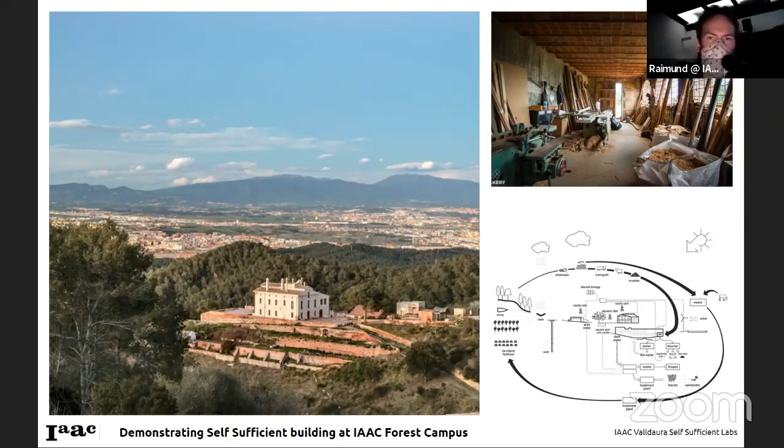So now, how is IAAC connected to timber? Well, it turns out that actually we do own a forest. There is a property in the north of Barcelona, this fantastic campus of Valldaura, where there's a group of students living there and exploring self-sufficient buildings in a dedicated master, building prototypes like this one.

But also, when you have a forest, and this is something that for sure Martin will recognize, when you start understanding the material from its origins, and scanning already the growing trees to impact the design of the finished structure, then this is something that becomes possible when you're so close to the origin of the material.

And this is a project that Jean-Nicolas and Surush Garivani were doing at IAAC a few years ago in the Master of Robotics, scanning timber and doing this kind of wood sashimi. And the approach is to kind of tame the material, not by standardizing it into simple geometries, but to have an understanding of the material on a quite complex geometrical level, and with advanced fabrication methods, these geometries

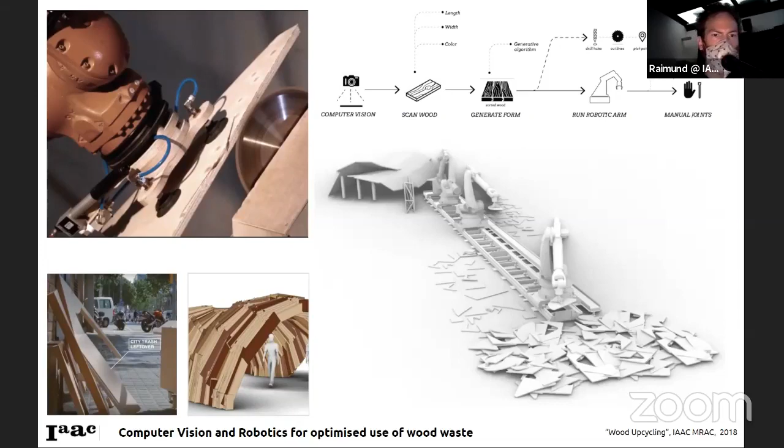And then the almost, let's say, normal way to use a robot just to do these dull, dumb, and dangerous tasks, repetitive and boring, but with slight variations in geometry that are difficult and for sure expensive to do with human workers. And this is actually the predecessor of the structure that we put on the rooftop this year.

A greenhouse that consists of these standard profiles in a particular arrangement. And right now we have the follow-up project of this one on the way, which will be a greenhouse we're building in Sofia in the course of a European project.

And last but not least, from the seminar that Manja and myself are teaching, we are doing this kind of timber, let's say, almost as an educational tool for first-year students to understand about fabrication, structure, but also assembly, logic, etc. Everything needed to actually physically build a structure like that. And this happened to be in Kathmandu, in Nepal. So yeah, that's it from my side.

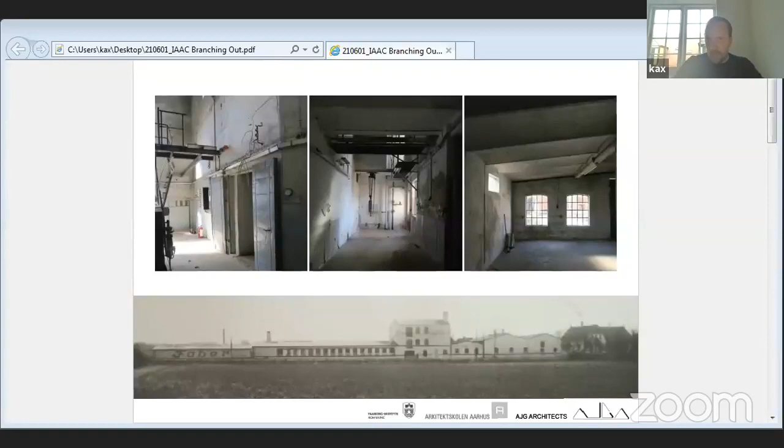So I'm just going to go ahead and share my screen. I hope I'm getting this right now. Do you see the slide? Yeah, looks good. Okay, good. Just going to try and make it full screen.

Right. Okay. So the project, as I said, is an applied research project, which we got a grant for from the government here in Denmark, trying to address one of the issues which is not only an issue in this country or in Europe, but also globally: the enormous amount of actually quite qualitative empty buildings that we have sitting around in the countryside, which is mainly due to two reasons. One is the rapid urbanization that we have obviously experienced in recent years, as well as the fact that, especially in Western countries, a lot of industrial buildings are left empty because production has moved to the Far East, which is the case with this project.

So this is an old factory in the middle of nowhere in Denmark. It used to house a factory which produced blinds and curtains. But again, the whole production moved to the Far East, I think like 20, 25 years ago. So the government came up with this proposal to give a grant for coming up with ideas on how to retrofit these types of projects. So this specific building is just meant to be viewed as an example. We were more employed to produce a strategy on how to generally retrofit empty but quality buildings in empty areas.

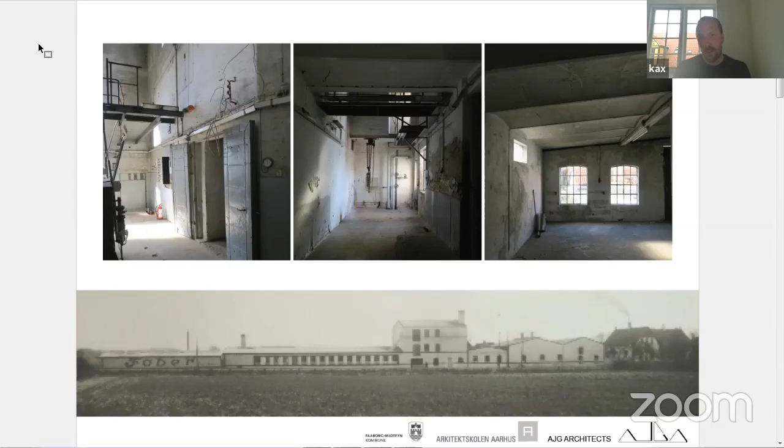So it's an old factory in the middle of nowhere in Denmark, and since I only have 5 slides, I'm jumping quite fast, but one of the targets was to employ digital fabrication and manufacturing techniques. So we started out by scanning the entire building. And what often happens with older buildings is that it doesn't look the way it did when it was planned out and drawn. New additions appear, it gets remodeled, things start falling apart here and there. And so it's actually extremely difficult to just go in and retrofit it immediately, at least with clean methods.

So the idea is that we scanned the entire building, which would enable us to extract exact data out of the model, and thereby produce, for example, in this case, I'm using the example of the partition wall, which is the simplest component that we had, an exact outline of the wall to be put in place.

And the other part of the project, which I myself find extremely interesting, is that even though the objective from the beginning was to employ digital building techniques, since it's an applied research project, we knew from the get-go that there would also be a process towards the end where we would have to hand over building material to workers who are actually carrying it out using predominantly manual conventional building techniques. So this balance, to which extent it makes sense to employ digital building techniques versus conventional building techniques, is something that we tried to plot out very deliberately from the get-go.

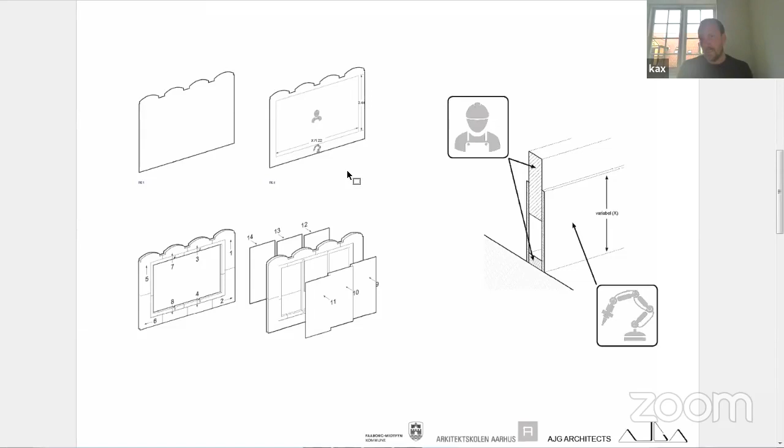And so thereby we have this entire strategy on how to try and retrofit an entire existing building from the inside by creating a sort of lining on the inside, which is made out of LVL rafters and digitally cut CNC pieces that fit precisely once you start assembling the pieces from the inside.

So the process looks something like this. You would create a digital model that accurately describes whatever panels and walls and elements that you have inside. We test it against the scanned point cloud model, and then what you see on the far right image is a one-to-one mock-up which we did at the Aarhus School of Architecture. Just to start to test things out, and it actually worked quite well.

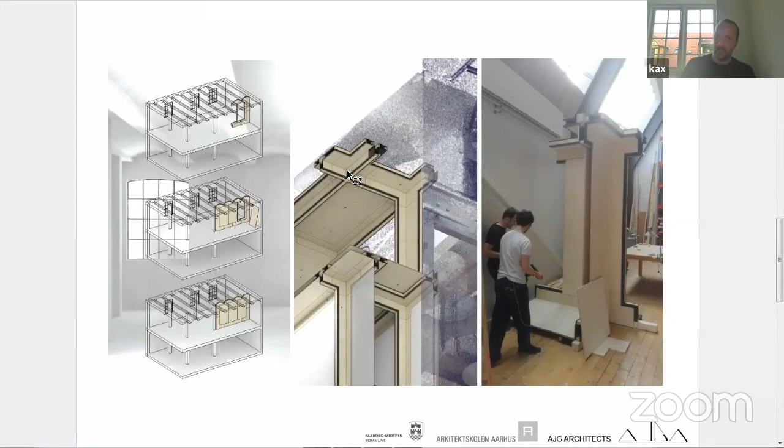So it's a multi-layered paneling system where you can either fit insulation or pipe work such as electricity or hoses or water pipes inside of it. But obviously after this process, things started progressing a little bit as we were working towards the final product, where in the end you actually end up with something slightly different. I mean, it's the same method that we've been using the whole way through. But as soon as things started getting real, we had to adapt to the existing conditions, also considering the fact that this is actually a rental space.

We have created algorithms that actually calculate how you can maximize the amount of standard panels versus the CNC cut panels that we would use to fit out the spaces. So this is the result. It finished maybe a year ago, 6 months ago, and obviously the idea is that this is a method rather than a final product.

So right now we're working on a similar approach in another post-industrial building. We're turning an old factory into a headquarters and an office space for a clothing brand. So I hope that this already broadens the idea of what you can use timber construction, or ideas of using wood and digital fabrication, for.

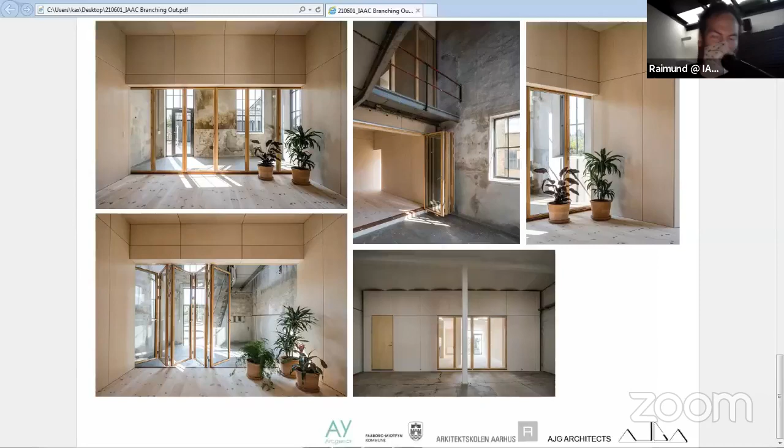Yeah, super interesting. Also the two approaches: one of super custom tailoring of these neuralgic interface pieces, and then using standardized sizes wherever possible. So very interesting.

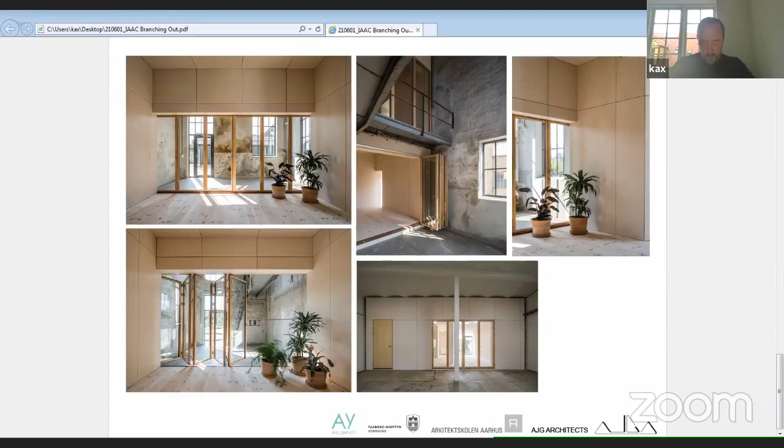I don't know if I can kick you out or if you have to stop sharing your screen. I probably have to stop sharing, right? Let's see. There we go. Thank you. Teresa, are you ready? I am ready. Whoa, hang on a minute. Okay. There you go. Can you see my screen? We do see your screen, but the full screen didn't really work. Then I'm just gonna stay in the slides. Oh, that's fine. So you see it now.

Okay, so thank you very much for the invitation. My name is Teresa Cheung, and I have taught in Alice for quite some years. I am now the academic head, and I run it together with my colleague Daniel Zamarbide. And the chair of Alice is in fact Dieter Dietz. So we take care of the first year teaching program at the EPFL.

And Alice stands for the Atelier for the Conception of Space. So as our name suggests, space is at the heart of our reflection, both in its construction and its conception. The first year is supported by many different structures. One of the most essential of which is this. It's a year-long program that spans over 28 weeks.

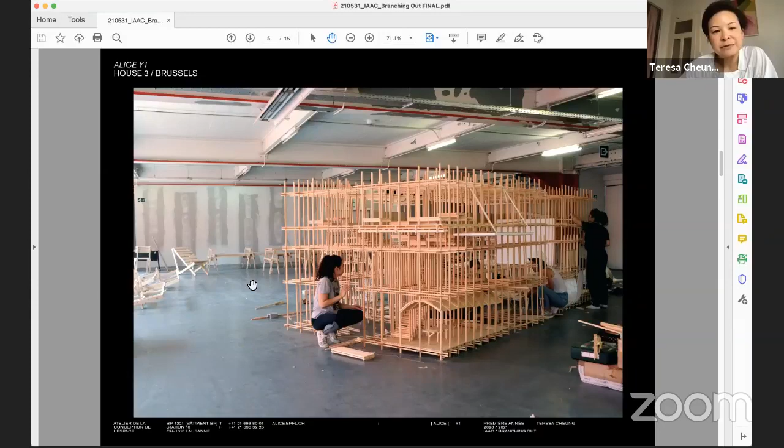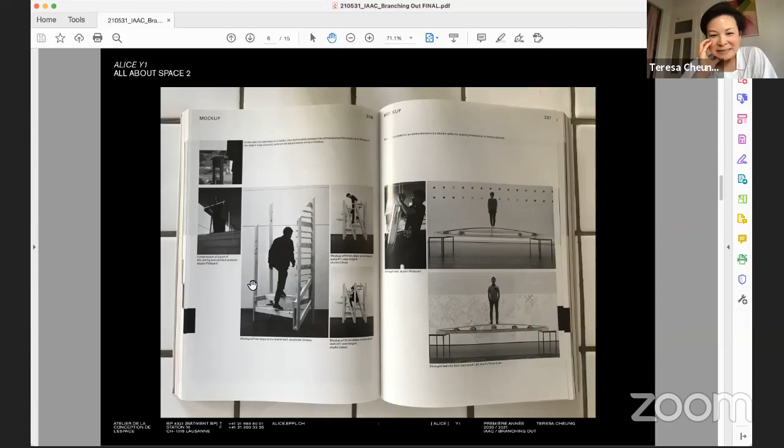Here you see a really full-blown 1-to-1 model of the protostructure that was devised for Brussels in 2017. And it's really a structure that allows for students to negotiate and appropriate space and to articulate the spatial practices that are implied by the projects that they propose. And as I said, we have no atelier space, so everything has to be able to take place within the school ateliers. And here you see a series of mock-ups that are being tested, that exist in a book that Alice published a few years back.

But I think also for us, the tools or the manner, the attitude which we are faced with when we work with these, and we work very simply with it. In fact, we are often using profiles of 60 by 27 or 100 by 27. So our attitude towards it is we find that it's very similar to taking a pencil to paper or a knife to cardboard. We also do a lot of casting, and then the saw to the wood. So we find that the attitude or the behavior is very similar, or it can be very well echoed amongst each other.

And we also have, despite the last 3 semesters, which has really put all of this into question, for many years been teaching our students to draw by hand, mainly for its slowness, its ability to allow time to reflect on what the students are doing, but also this very physical connection between what was speculated in the mind and then a physical act of bringing it out.

So, these are the kind of tools we use. I guess the most crucial one here is the Japanese saw. Pretty much everything that we build is cut with a Japanese saw. It's only in the last 2 weeks that we have access to 2 kind of circular saws. Otherwise, it's the Japanese saw and a series of electric drills.

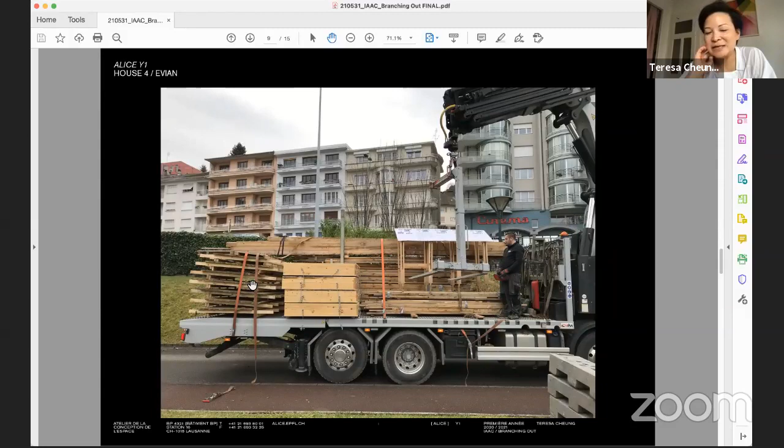And one time it was hand carried 500 meters from the ateliers to a site on campus to be installed. Another time it traveled from Lausanne to Brussels. But we go to the lengths of even making the students draw how they would pack every truck load that has to go anywhere.

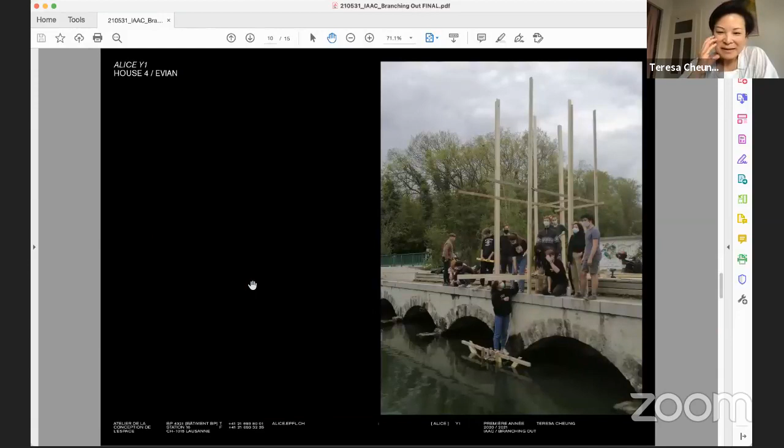And of course, I think we are often in very public places. This year we worked with 4 communes in Geneva, as well as the city of Geneva. So it was a lot of politicking around. But I think what has been really nice with the quality of this material is that it has always allowed us to be very sensitive, very light in the way we touch the sites. This is actually not Evian, this is actually this year. This happened a few weeks ago. Students were testing out a way to anchor onto this small bridge.

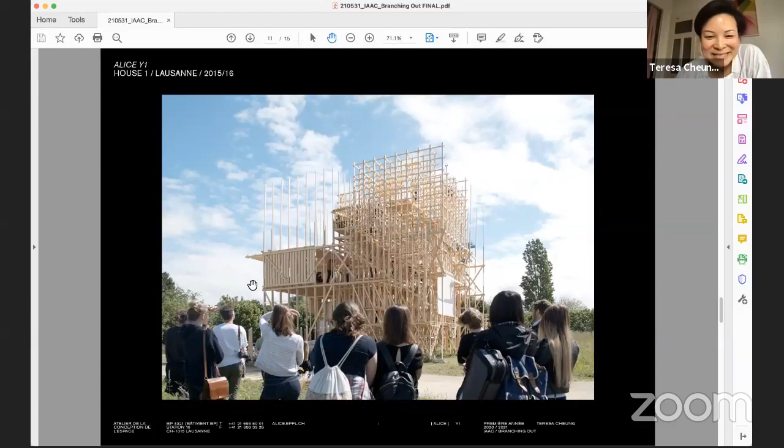And the concluding slides are just a series of the results of the past years. We call it the house series. Each of the protostructures for each of these years have been slightly different in dimension, but also in how the node has been conceived. This is house 1 that happened on campus in Lausanne, which was an open space.

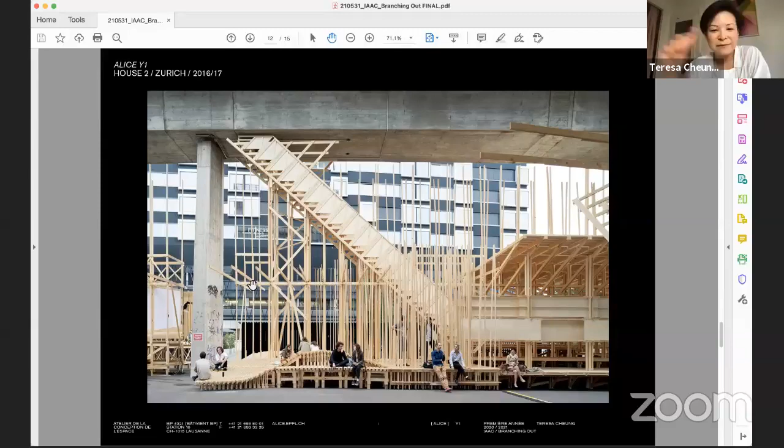And here it's house 2 in Zurich, which was right outside the art school, in case anyone is familiar with Zurich, which has this really high and very long highway that goes right next to it. And actually this is just the very start of a very, very long strip that travels all down this infrastructure. And then house 3 in Brussels in the old Citroën garage. That was another site condition again, that was completely an interior condition.

And then house 4 in Evian. And actually it was at this moment that they started to fragment into pieces. So this is one of, I think, 6 fragments that was orbiting the Jean Prouvé pavilion as part of the Evian mineral water complex.

So yeah, this is kind of what we do at Alice, and thank you for listening.

Thanks very much, Teresa. Very inspiring, and also I'm looking forward to the contrast that we have here from the different approaches and focus areas of our guests this evening. So from a, let's say, very crafty, hands-on classical tool approach, we're moving over to Martin, and I'm curious what you're going to show us.

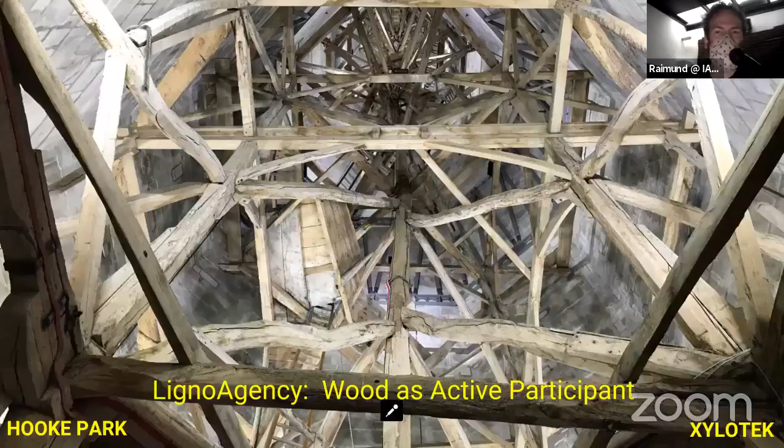So far, no sound. Apologies for that. Can you hear me now? Yes, we do. Great. So yeah, thank you for the invitation. Real pleasure to be speaking.

I think it's right that I'm going to present a bit of a contrast to Teresa's presentation. I think maybe not so much that it's less crafted, but there's certainly less straight lines in these 5 slides. I'm just going to cover some little snapshots and some thoughts, I suppose, rather than any sort of complete project discussion.

I'm speaking a bit with 2 hats on, as you introduced me, from my academic background with the AA at Hooke Park, a woodland campus, really timber focused and very much engaged, much like Valldaura, in directly working with the wood and the local material. And then Xylotek is a practice that's emerged a bit from that, set up with 2 other directors, both people we all met through supporting the projects at Hooke Park.

I think, some lessons learned from working in that environment, but trying to bring that into a practice that's operating commercially and in the context of the timber construction industry. So, interesting crossovers. I mean, this slide, I guess, is a sort of provocation.

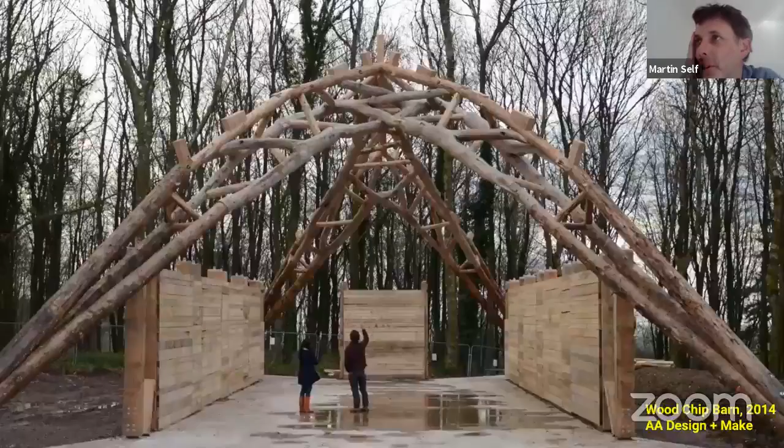Sort of jump to one of the Hooke Park projects, probably familiar to quite a few people, obviously relates to the work that IAAC have been doing more recently that Raimund presented. So I suppose it's taking three key elements: an understanding of the form of the tree itself, the potential that 3D scanning is opening up to really capture digitally the inherent form of the timber, and the possibilities offered by robotics as a way of working with an irregular material, but very precisely at their intersection points.

So this is the product of one of the Design and Make cohorts. Design and Make is a master's program at the AA, based on the premise that design can happen through acts of making. So in different scales, but very much working with wood, located at the Hooke Park campus here. So the potential is quite profound, that literally the trees you can see in the background of this picture are the material for that structure, and really trying to exploit the particular inherent capacities that the tree has. It's a natural material. There's a deep evolved capacity of wood.

I think perhaps part of what I'd like to advocate here is that we shouldn't just be thinking of wood as stuff that we use like other materials. It has these very particular internal structures that are a consequence of its capacity to grow, its capacity to transport water and sugars through it, its very particular responses to light and to structure. And we can either try and average those out in conventional engineered timber technologies, slice it up and glue it back together, or we could try and work with those qualities that are the inherent developed characteristics of wood. And I guess something that this project is trying to capture is that there is this alternative view of wood as something where you work with its characters, not seen as deficiencies, but as potentials.

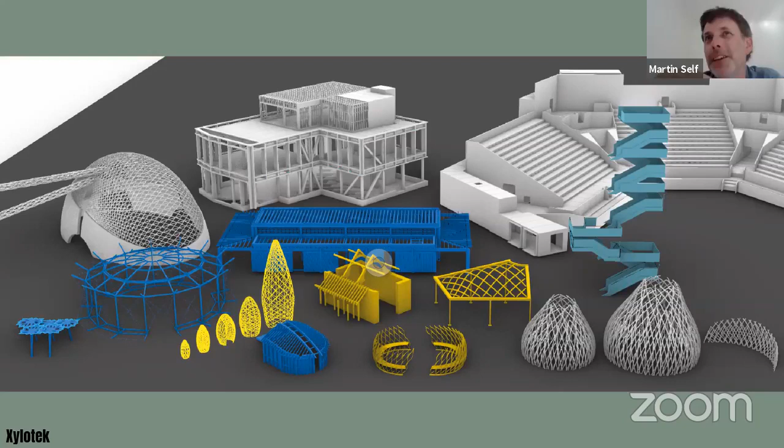So fundamentally, my co-directors have both come from making backgrounds and deep embodied knowledge of working with wood, trying to marry that with the technologies, and running a workshop where we do smaller scale stuff. So the prototyping and the smaller, more hands-on stuff to keep a feedback between the consultancy work and the made work. So we're quite young, but we're working at a bunch of scales. The blue things we've completed, the yellow things are now more or less on site or close to completion, and the grey things are things we've consulted on or are now through design stages seeking to deliver in the future.

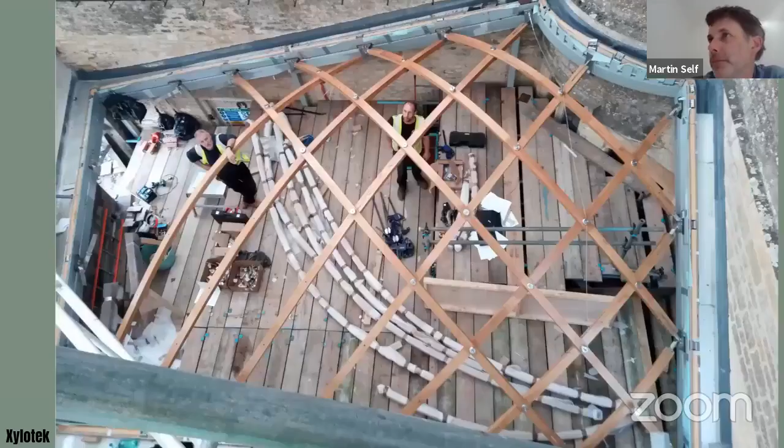This is the project. This is on site now. This is taken on Friday. It's a small little project, but quite a bit of work just to refine how you develop a single layer grid shell in a way that works in sympathy with the material. So it's going to be glazed. It's a semi-internal space glazed grid shell.

Each lath is formed geodesically, so it's working with the wood hopefully as efficiently as possible. So taking these oak lamellas, which are straight laths, straight lamellas that then just bend in their minor axis sense and twist to take up the shapes across this doming form. So it's quite a neat technique for getting the material to work in sympathy with the geometry coming together.

And the final slide, a bit of a teaser for a project that's just finishing up in Paris, not yet in the public domain, but this is smaller scale pavilion work, work with steam bending, so a magical process of plastically transforming wood's form. This is with ash.

It's interesting to argue, I guess, about the pros and cons of the industrialized paradigm of the timber industry. I think Katerra was mentioned earlier. The move towards major industrialization obviously has its benefits of economy of scale, but perhaps is also risking taking away the ability to work closely with the material. In the 21st century, we have other potential to work with more distributed modes of manufacture and to bring our technologies to the material, and not necessarily to pursue a major centralized approach to production.

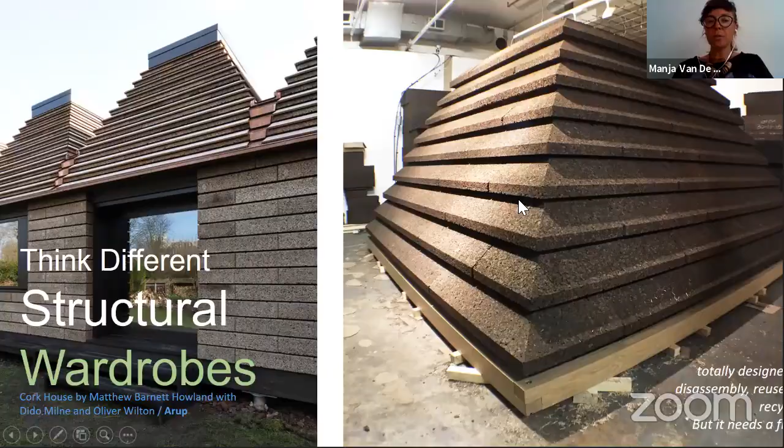So what is important here is that timber is actually working together with cork, thinking differently with these timber structural wardrobes. So this is the Cork House. You must have all seen it. It's really about design for disassembly, reuse, recycling, etc., and obviously trying to use a new material. But here timber is the reliable friend to cork, because it has, as you see here where I'm pointing with my cursor, structural wardrobes that ensure that they could actually use an unfamiliar material.

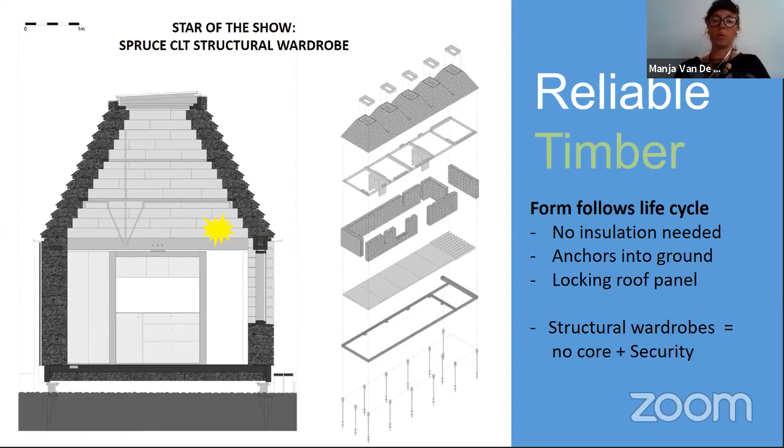So in some cases we try to push the boundaries of timber, but in other cases it can also allow us to push boundaries of other materials. And I thought it was quite great. So if we are thinking about this way of friendship, this is another project where timber is thought of collaboratively with concrete. It takes two to tango.

So this is a project that I did together with Adrian Campbell, where we created together with Waugh Thistleton a feasibility study to create a combined concrete and timber high-rise structure, so 23 levels, around 72.5 meters tall.

But what I want to say is that when there are two people dancing, so in this case timber and concrete, obviously there's not one way to do it. And obviously we can think of different kinds of hybrid systems. So is it the glulam with CLT infill structure, or is it the clear span CLT that actually spans directly from the perimeter to the concrete core, or is it all cross-laminated timber?

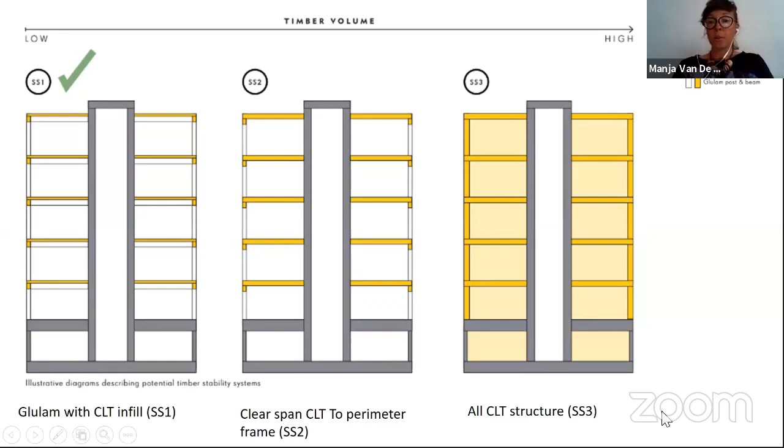So here it says that the timber volume is obviously increasing, but actually what I want to say is that it's not all that black and white, because for each of them there are pros and cons on how they work together. And perhaps in the first one, where it has glulam and CLT infills and CLT floors, maybe the whole buildup is thinner, but there needs to be much more coordination with the downstand beams.

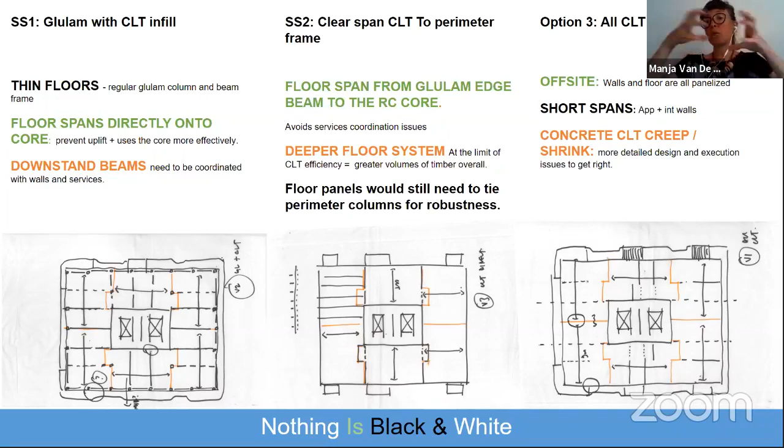Or if you would go for option 3, which has an all CLT structure, which can be really fabricated offsite, then we still have issues on how to combine the CLT with the concrete when we are looking at creep and shrinkage of these two materials.

But because it's not black and white, actually this is really great, because if you're thinking about, let's say, two materials or two approaches combining, in this case an OSB block system, which is called cassettes in this case, developed by Mass Bespoke, which I worked on as well, it is actually combined with other standard elements.

So similar to the first project where I talked about cork and timber, in this case it's standard timber elements, either shown on the left-hand side as beams or on the right-hand side as vertical elements, columns, that then work together with a less off-the-shelf system. So this dialogue between the two I find really interesting.

Then not only timber to timber or timber to concrete, but if we are looking at, for example, steel, this is another project. Actually, it has been done with masonry bricks. But I want to showcase it also as an intention where we can bring together, in this case, this very thin metal strip that then is going to get infilled, which could be with timber blocks.

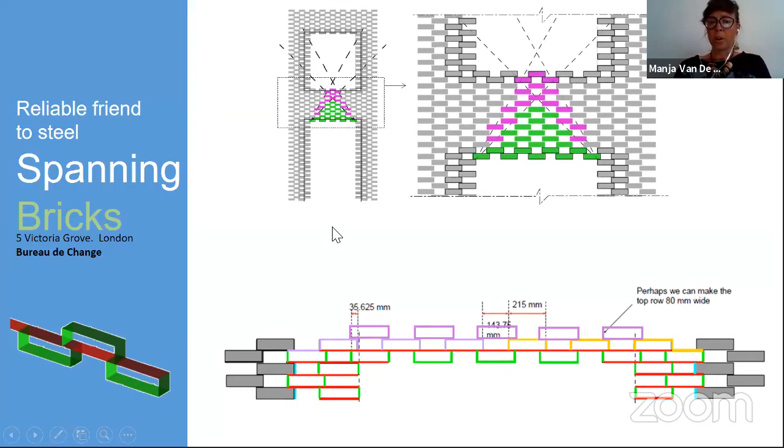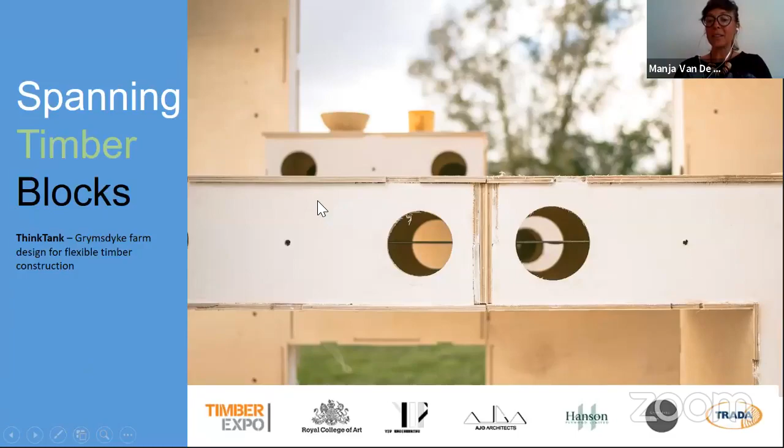So more of these timber blocks, and you see here almost this piano wire running through, is a project that I did together with Kasper, who presented first, and also some of you, so Raimund and Tom were also there to collaborate in this think tank, where we created this dialogue between cassettes. So again, volumetric timber blocks, but then with post-tensioning elements.

This is all about later thinking about design for disassembly, but also about being creative with post-tensioning, and also maybe being a bit messy. And I think this is really great. We worked here together with students and professionals to come up with this system and to try to develop it. And I'm all for messy because it just means that we don't really know yet what the outcome is. So it's quite nice to explore. All done at Grymsdyke farm just outside of London.

So then the final project that I want to show is by Hour. This we just completed, but it has also already been disassembled. It has been up for about a month. And again, you see the recurring timber blocks. There's a lot of research and development that I have been doing with my practice about developing those and obviously trying to make them span.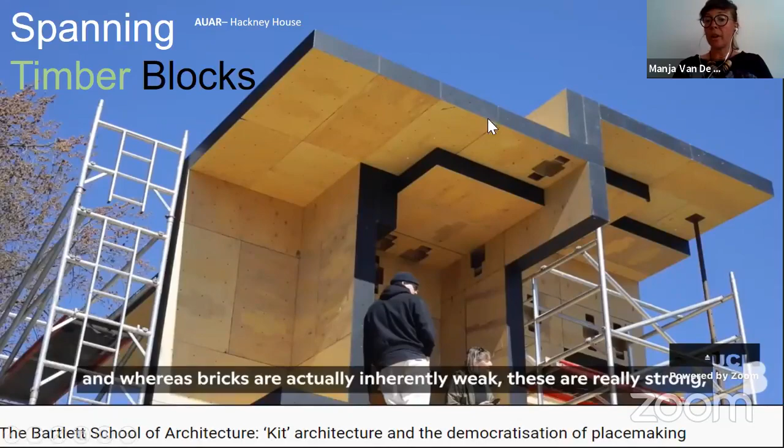So here, again, the timber blocks are tied together, but not with cables, actually with rods, as you see here in red. And we can make all of these connections. Obviously, we have done some simple testing.

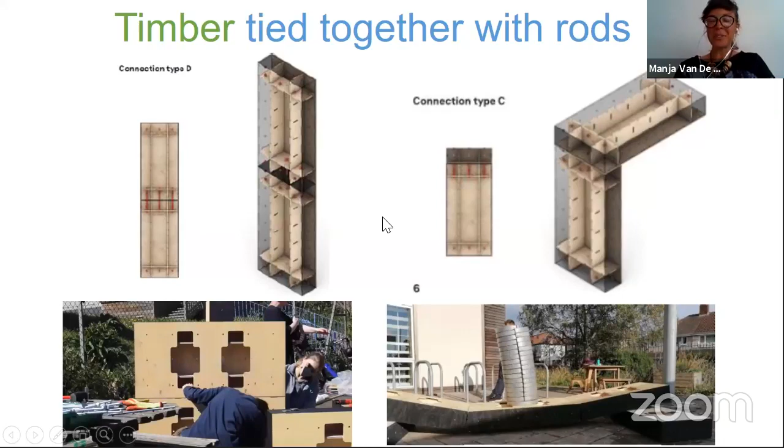But I think what is important here is that this design for disassembly also asked about something else, where before I said it might be good to have your standard timber that we all know. But in this way, we are actually saying we have been using in this structure more lazy and more active blocks. So the lazy blocks in this configuration have not been doing so much structurally. So we know that they haven't deformed, or we really still know that they're closer to their initial strength. So when we are disassembling and reassembling, we are assigning the lazy blocks to become the hardworking active blocks, and the previous active blocks to become the lazy blocks.

So again, kind of thinking about this kind of dialogue of how we can strategize this kind of collaboration. So yes, just to finish with the slide, timber is your reliable friend. Obviously, I've been showing you options and ideas of how it can really work together. And here you can see a quite long span just made of these blocks together. And they were also proud sitting on it, which I thought was a nice way to end and to tell you this little story about our reliable friend, timber. And that's it.

Thank you, Manja. Unmistakably Van de Worp presentation. Thank you very much, and a lot of work that I haven't seen yet. And when we think about architectural vocabulary that now expands, that is based on timber, I think we've seen already quite a lot of the potential, from blocks to tree branches to standard elements, etc. And I think we will see more.

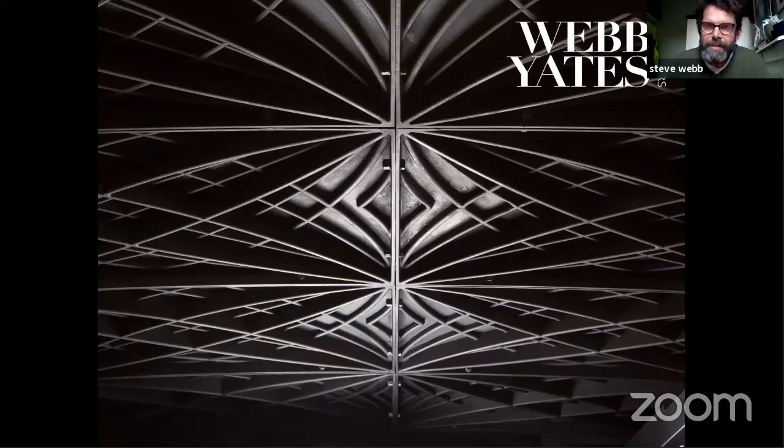So we're Webb Yates. We're a multidisciplinary practice with M&E engineers and structural engineers all mixed up. There's about 60 or 70 of us, I think. In most circumstances, I don't feel like a very commercial person or the owner of a very commercial practice, but after all of your presentations, I am really feeling like the Tesco's end of this conversation. We work on all scales of project, from a very small Strathskin timber shed on the left, right the way up to really big infrastructure projects at Heathrow Airport. That's a 190 million baggage handling thing under the taxiway at Heathrow.

And we've had for a long time a drive for sustainability. So we try and make things out of timber whenever we can. We try and make things out of stone, and just inherently try and make things more sustainable. But a lot of the projects we do are not sustainable, don't have sustainable clients, aren't in sustainable environments. So we try and bring sustainability to reluctant recipients most of the time.

In timber, Manja has slightly stolen my thunder with her tango of concrete and wood. We try and push for timber all the time, and we're really struggling at the moment with fire and lots of arguments against timber durability and all kinds of things. And I'm thinking a lot of timber projects are going to die because of this, and there's not very much support from the timber industry in terms of overcoming the problem with fire, particularly in the UK because of Grenfell. And I imagine maybe it hasn't reached quite that level of inspection in Europe. It sounds ridiculous, doesn't it?

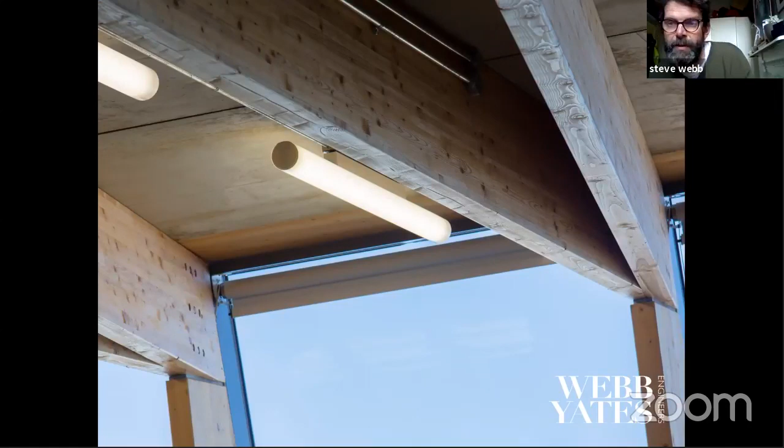So we've been looking for a number of years at mixing and hybridizing timber and concrete. This is a small art school, Wimbledon College of Art. We designed the M&E and the structure for this, and we're trying to find a solution for the structure that suits the M&E as well. If we have a building with a little bit more thermal mass than a normal timber building, then we don't have to have any air conditioning. So this building is designed with passive house principles, and it has 2 floors of very thin concrete slabs on a timber frame. So we're mixing supporting concrete with timber and using the concrete to absorb heat from the building and thereby not have any air conditioning.

We've adopted this as a principle, and we're doing several more projects like this, but this is the Anna Freud Foundation in London, which is a £17 million office building with various components, but a big part of it is the timber frame on the right and the left. And here again, we're building a timber frame with composite concrete floors. The building has, again, no air conditioning because of that layer of concrete. And the timber is connected to the concrete in a composite way.

So when the timber beams deflect, they squash the concrete. The concrete works in compression and the timber works in tension. In this case, it's a BauBuche frame. So those are all exposed in the inside of the building. So I also, like Manja, think that some kind of hybridization of concrete and timber is a good idea.

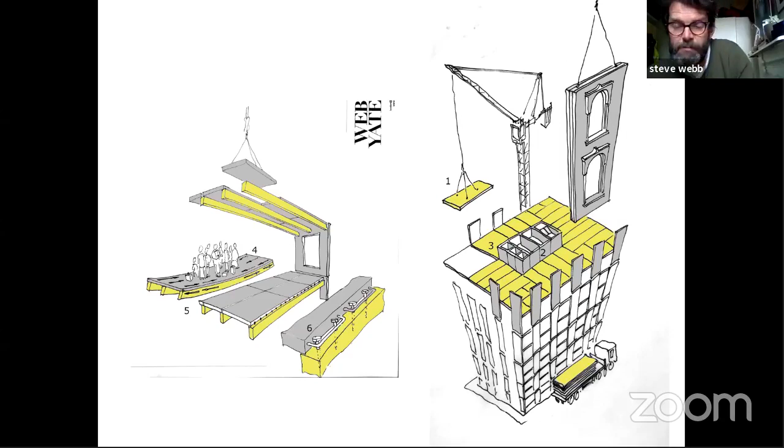The regulations in the UK now are that you can't have a building with flammable materials in the facade above 18 meters, and they're thinking about reducing that to 11 meters, which means that for any kind of mass timber multi-story project it is going to be quite difficult to have timber in the facade. So mixing concrete and timber is quite a good combination for high-rise buildings.

And actually, when you look at the volume of materials in a building, this is very similar. We were looking at a 20-story building, very similar to the one that Manja was looking at. The bigger volume of material is in the floors, very little in the facade. So actually, if you have vertical concrete structure, you overcome the fire problem, you overcome axial shortening and stability problems, and you use the concrete in compression where it's quite efficient, and then you have all the floors in timber. The negative carbon of the timber far outweighs the positive carbon of the concrete, and you use the materials in ways, you know, to their strength.

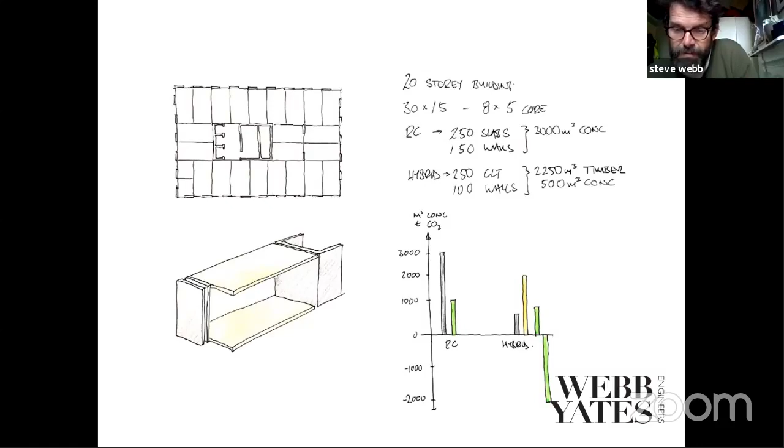The typology of precast concrete and mass timber construction are really, really similar. The two sets of people never talk to each other. They have nothing to do with each other. They never work together, but actually their operations are really similar. So we were thinking about trying to bring a precast concrete manufacturer and a timber manufacturer under the same envelope. No main contractor would ever employ two separate subcontractors to work on something which has layers like that, because they always fight over the crane. You need them to be the same company. And so we're kind of advocating for them forming joint ventures for those sorts of jobs.

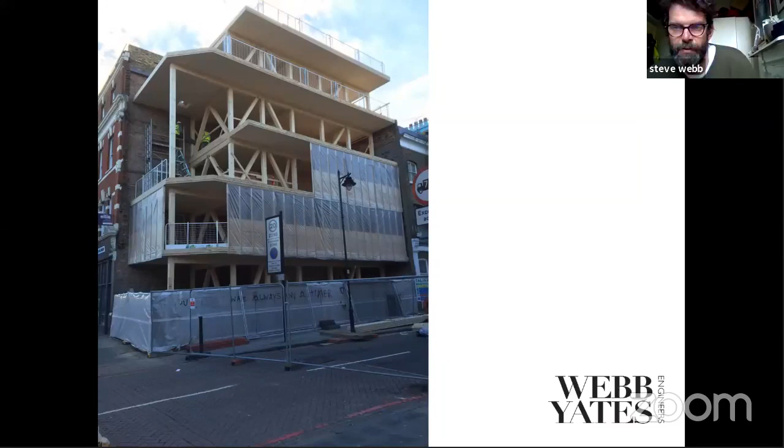So we've had a go at a very small one of these, not the precast version, but this is with Amin Taha in Islington in North London. That's in situ concrete cast in CNC cut molds, but actually inside there it's a completely timber frame. So we build the entire timber frame first. Building the frame first means that you don't have the fight over the hook. The concrete guy needs the hook, the timber guy needs the hook. You need them on site at separate times. So we built all the timber on temporary props and then built the concrete around the building afterwards, and then took all the props out. So you have this kind of hybrid frame.

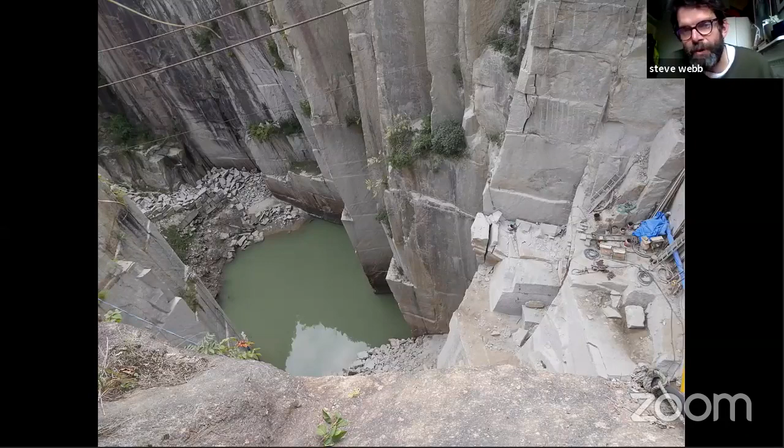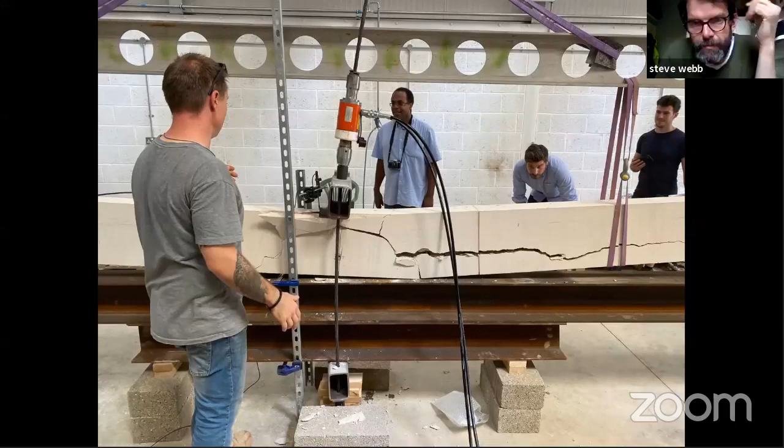And finally, we do loads of work with stone. And stone is a really powerful low carbon material. And so I think the next step in our explorations, and a couple of projects that we're working on at the moment, are hybridizing stone and timber rather than concrete and timber. So using stone floors above timber beams. We've done a lot of R&D in stone. We're working with UCL, people like that at the moment, on reinforced stone. So I think, yeah, timber won't work for everything. But maybe timber and stone are a really good combination for a more sustainable building vernacular.

Great, thank you, Steve. For me, it's an interesting angle to see, even if you don't consider yourself the commercial guy, but from very close to large scale projects, what is a more pragmatic but still innovative role of how timber can find a place where it still creates this sustainability benefit, but through this combination with other materials, you are not suffering from its shortcomings. So that I find super interesting, and it seems to work really well.

Super interesting, and a lot of themes that I will perhaps touch on as well, both similarities and also differences, which I think is the point of these things, isn't it? Covering a range of approaches.

So I'm talking to Steve's point, perhaps, about going to the most commercial project. I'm not sure he was. I think I'll compete with him for that.

So the theme of my talk really is mass timber, mass market. I anticipated that quite a lot of the projects shown today would be more about craft and the particularities of materials, both in their raw state, experimental structures and discovery, and I think therefore it's interesting for me to show what we concentrate on more at Waugh Thistleton, which is trying to make engineered timber of various kinds into a completely normal everyday material, something that people use all the time,

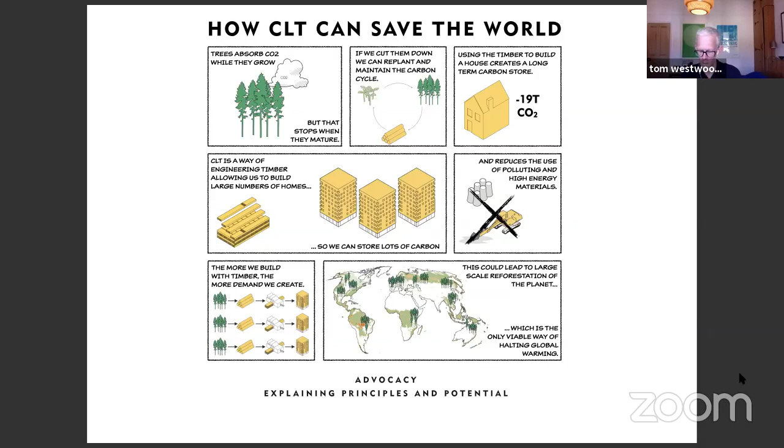We're also increasingly doing more research. We definitely didn't set up our practice as a research practice. We wanted to build things, but we are doing more research. I think we see the importance in that. Again, to educate people, to educate ourselves firstly, to look into the particularities of timber, how it performs, in ways in which you can use it both technically, but also in terms of legislation, which obviously varies from country to country and changes all the time.

As Steve was touching on, particularly in the UK at the moment, the fire legislation is indeed very challenging for timber. And to spread the word. And it's great that there are lots of people out there who want to invest in that research.

The largest project we're working on in that field at the moment is for the European Union, called Build in Wood. It's a 4-year project, very long, lots of partners, and really trying to develop different rules, connections, kits of parts, and guides, guidebooks really for the industry and for developers, for contractors as well, to persuade them and encourage them that wood is a good option.

Also trying to expand our work into different sectors. So we've been working with engineered timber for around 15 years now in the practice, and much as Steve said, we try to make all our projects timber. We don't always succeed, but over the years we've had most success perhaps in housing projects.

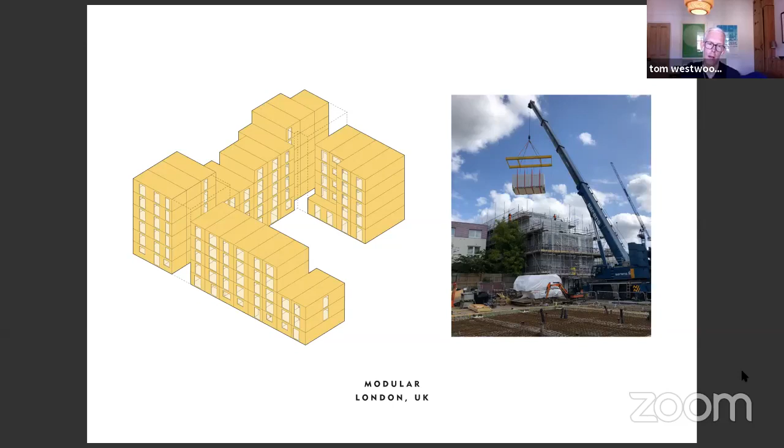So again, modular, not a new idea at all. Lots of modular housing is built and hotels and student housing. But it hasn't really been done before with cross-laminated timber panels for the walls and the floors of those modules. And it's a great material for that. You know, it's robust, it's rigid. It doesn't move around in transport so much. When you're building the box in the factory, you can climb on top of it and drill into it and so on. So it's actually very suitable for this, as well as being relatively lightweight compared to, say, concrete, which is sometimes used in modules.

And also trying to expand our thinking a bit more into disassembly. So traditionally, when we've worked with cross-laminated timber and glulam and LVL as well, it's very typically screwed together as elements. And whilst you can take those screws out, you're obviously drilling into, you're damaging to a certain extent the wood by doing that. So trying to look more in projects now at how we can make elements that can be disassembled and reused more readily.

So this project, this is the third incarnation of a pavilion project, which was originally in London, then rebuilt in a different configuration in Milan, and then this third configuration in Madrid in Spain, and is really trying to promote the use of mass timber, educate people in what it can do, that it exists in the first place, because we fully understand that most people wouldn't know what CLT was and have never seen it. So really trying to get people more familiar with it, raise their interest.

And we also took this opportunity to work with a fabricator who actually made these panels in the UK. It's American timber, because the client was the American Hardwood Export Council, but the timber was shipped over, and actually the CLT panels were made in Scotland. And CLT had never been made in the UK before. So that was, again, a great opportunity to show that it's possible, admittedly on a small scale, but to prove and engage more people with the process. So all these panels are bolted together rather than screwed. So it's very easy to disassemble and move around.

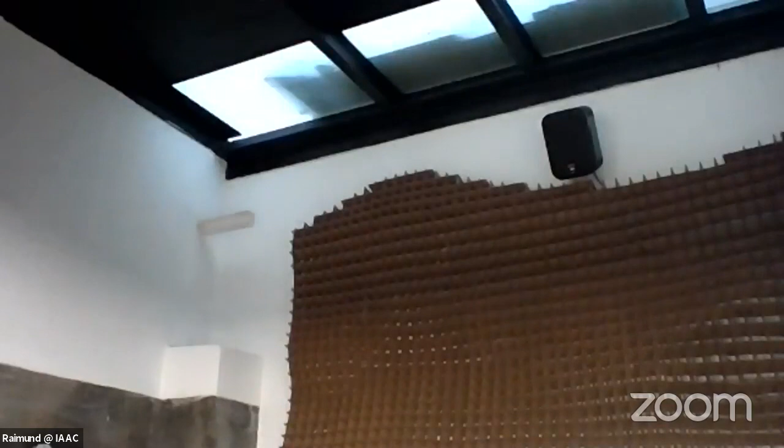Well, I was lucky enough to have to cut a lot of beams with a manual saw, and I can say it wasn't a pleasant experience. But yeah. So for this dull, dirty, and dangerous type of operations, let's say our robotic overlords are welcome.

Any other questions? Now is your chance, guys, before we switch to your presentation. I have a question, maybe as a reflection on this unpleasantness of sawing. Please, Teresa. Maybe I could pose it just to the students, because what is slowly alarming me on different levels, scales, in different fields, is this notion of disconnection. And I do wonder, not that everyone has to wield a saw on wood, but this notion of being somehow connected to the things that we build with or live with or use, whether at least having experienced it, how you develop that connection to a material, because to not experience it at all, I think, is also problematic. So I pose this to the students.

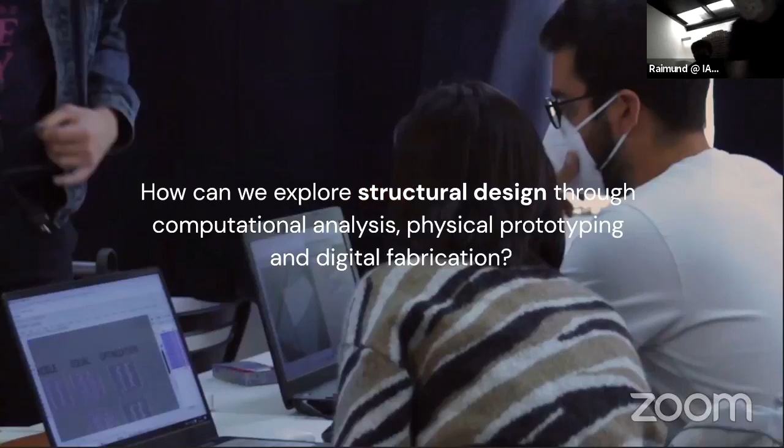How can we explore structural design through computational analysis, physical prototyping, and digital fabrication? The Data-Informed Structures seminar investigates how digital design and simulation, together with hands-on experimentation, can help to create innovative and enjoyable structural designs.

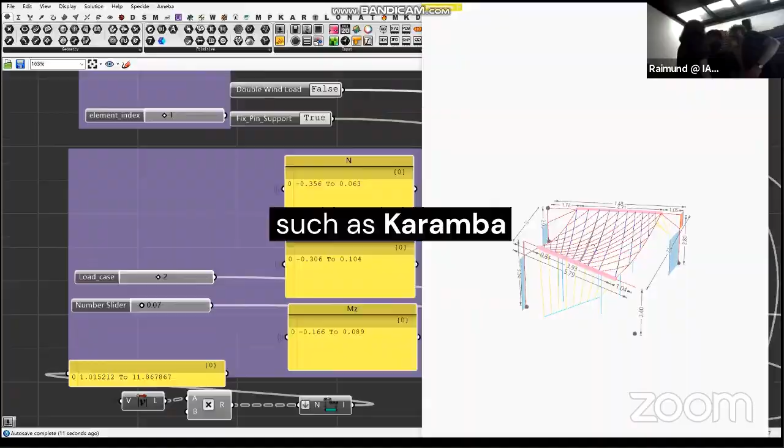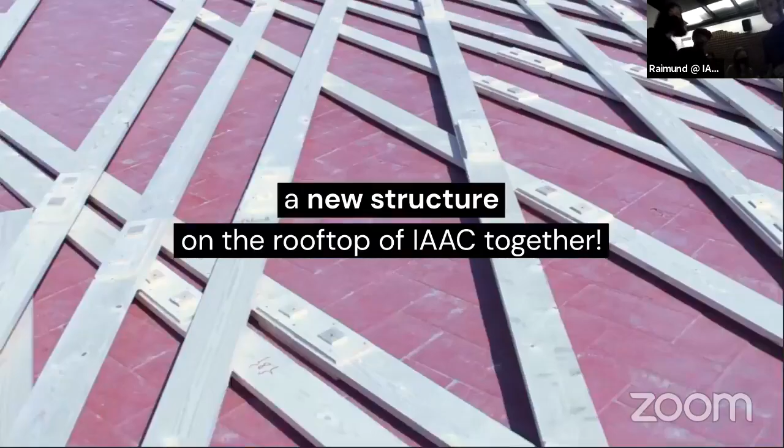Applying specialized computational tools, such as Karamba, to a real project. Verifying structural behavior through one-to-one physical prototyping. Creating and building a new structure on the rooftop of IAAC together. It tackles technical questions of structural design, joinery, fabrication, logistics, assembly, and teamwork.

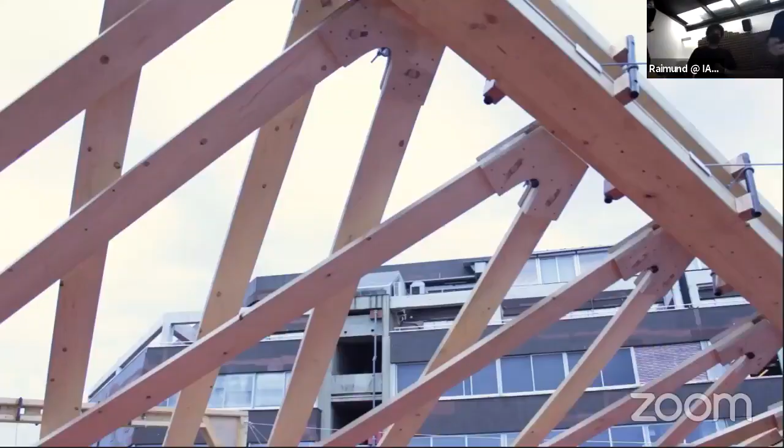Timber is applied in an unusual way, using it for tensile elements. Timber in tension. To transform the IAAC rooftop into an environment that can stimulate social interactions, a place for meeting, exchanging ideas, hanging out, discussing, shifting perspectives, learning, having lunch, and an enjoyable small escape from the intensity of student life.

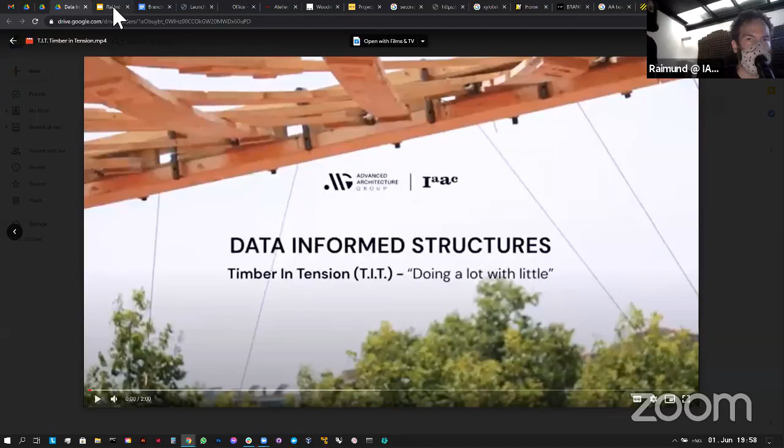All right. And I'm now giving the floor to Michelle and Laukik for their presentation. Bear with us for 1 second. All right, all yours.

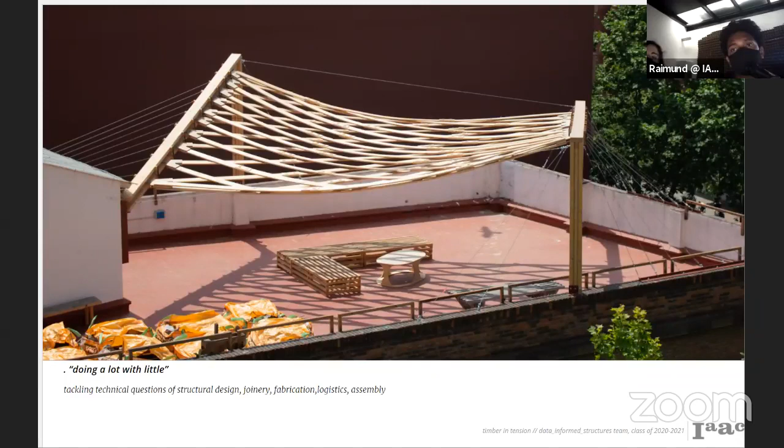Okay. The structure that we are unfortunately not under today due to bad weather is the result of this workshop that revolved around doing a lot with little. We think it could not have turned out any better, but wait, it's a grid with some timber pieces supported by 2 portal frames. Is that it? Well, there's a lot more to it than meets just the eye.

What is data informed structures? To put it simply, it's a seminar that bridges gaps between the digital and the physical worlds of computation, from design, analysis, optimizations with plugins like Karamba 3D for Grasshopper to fabrication, assembly, and building the structure itself.

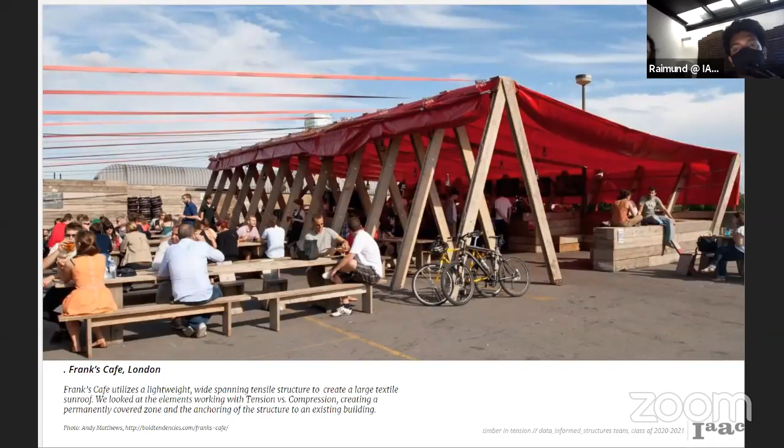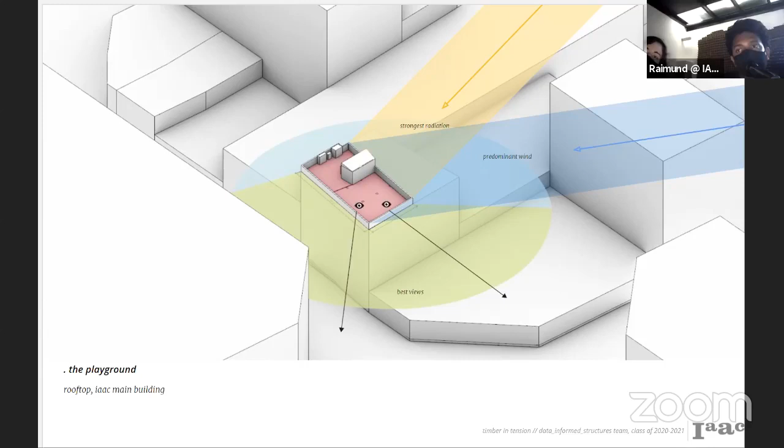While looking at doing a lot with little, we looked at Frank's Cafe in London, a light deployable membrane spanning between 3 rows of timber A-frames made a rooftop happening. I think it's the epitome of doing a lot with little, really. So coming back to the site we had at hand, we went ahead to look at the environmental and the structural factors that were going to guide the design. So moderate northbound winds throughout the year and harsh sun from the south in summers, along with views of the Pujades Street, were the major design drivers.

This brief was opened up to the students of the seminar as a small internal design challenge, and we could very easily have had one of these proposals on the roof, which explored various structural systems from tensile fabric structures, space frames to continuous surfaces. But what really was unique about the one that was chosen was that it used timber, a very conventional material, in a completely unconventional way.

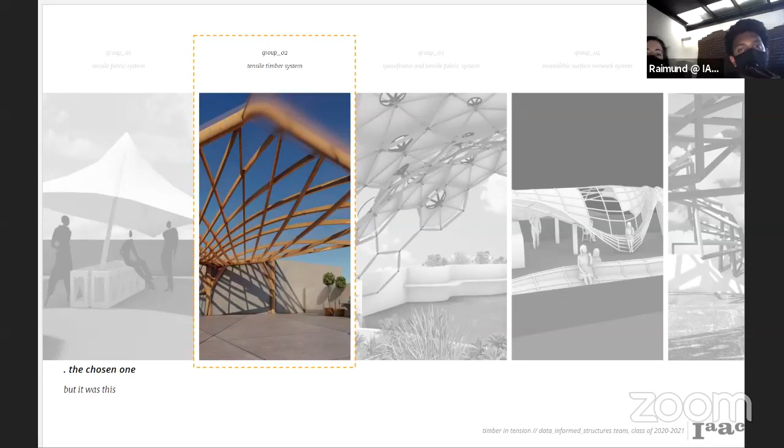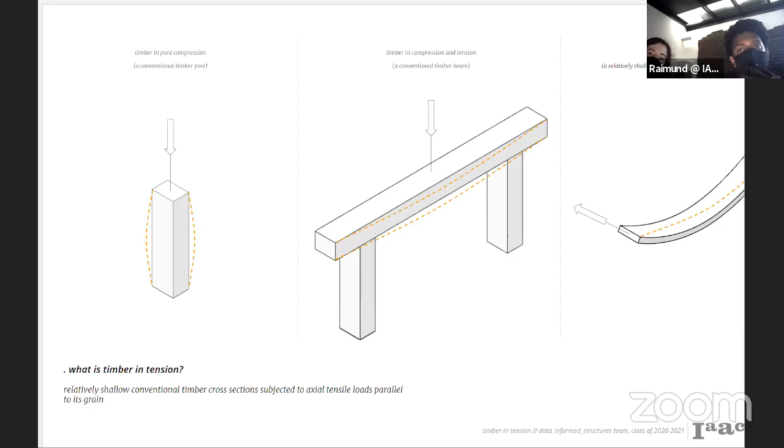Timber, as we know it, most prevalently is used either in pure compression in cases of vertical elements as columns, and a combination of compression and tension as beams or trusses, but seldom used in pure tension, and that is exactly what we are here for today. We also looked at the sawmill shelter from the AA Hooke Park, which is a structure that proudly demonstrates the capabilities of timber in tension on an anticlastic surface.

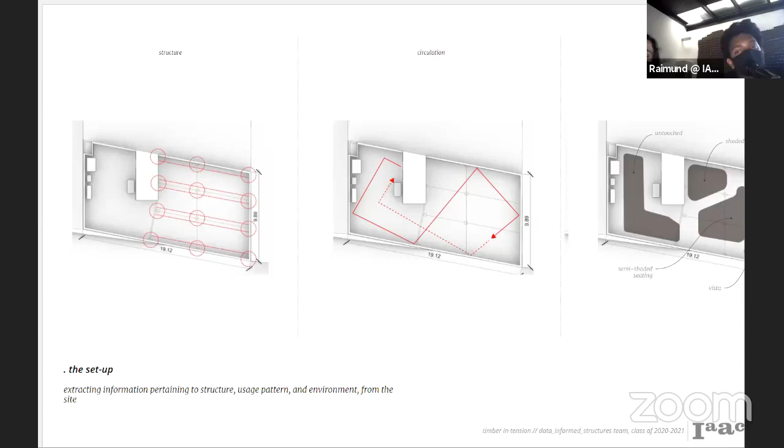So we took a closer look at the site, and decided to zone the roof into 3 prominent spaces. The first one of them would be the bar that you see in the top right corner of the roof, a shaded gathering area in the center, and the vista that overlooks the most happening intersection in Poblenou, and everyone here at IAAC knows why.

So since we knew that we wanted to base the roof structure on an anticlastic surface, we went on to analyze the principal stress lines in these surfaces, which more often than not would lie along the UV diagonals of the surface. So we built a surface up from these principles, with a grid of catenary and anti-catenary curves, both structurally acting against the self-weight and wind uplift respectively.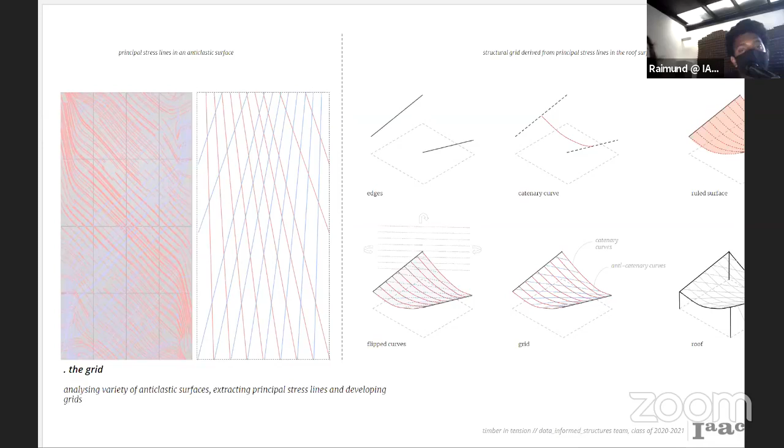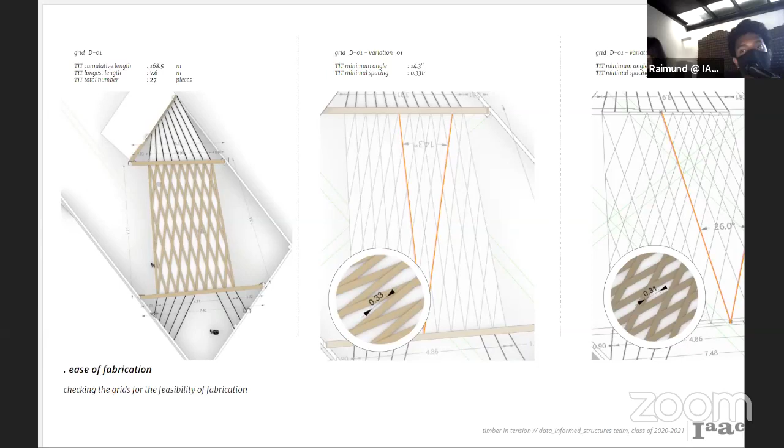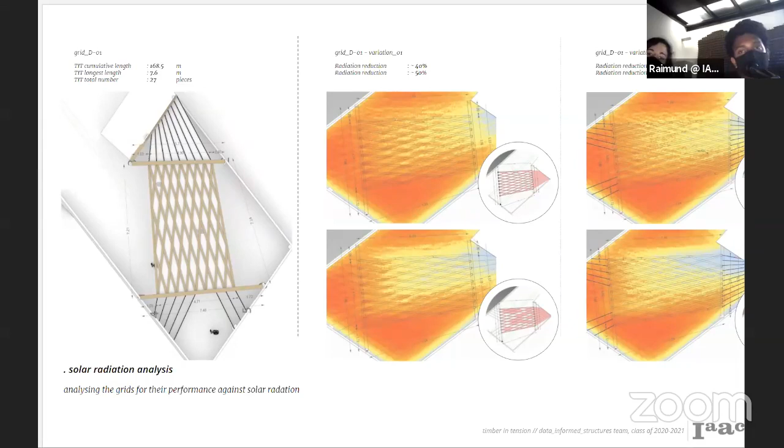We also explored a wide catalog of possibilities of grids, and we chose a particular grid for its uniformity and density, but that was not all. We also went ahead to develop variations in this grid in terms of density, patterns, and shading, and found out that the first 2 iterations performed very well. Not only in terms of ease of fabrication with parameters like angles and spacing between these timber members, but also in terms of its environmental performance and its capabilities against solar radiation. Well, after all, it's a rooftop, and Barcelona, as we know, is quite hot.

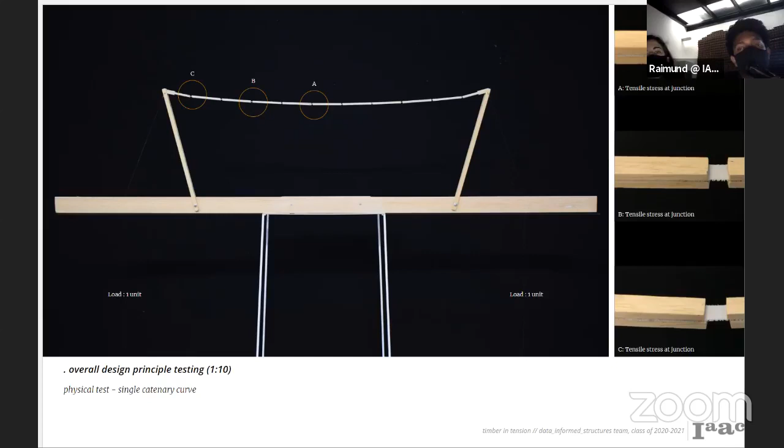This combined with painstaking efforts of optimizing this structure to make sure the TIT grid actually acts in tension, we went through a lot of analyzing back and forth with Karamba. Along with all these digital tools, what was also important was to explore these capabilities of timber in the physical world. So this is a test setup to visualize the degrees of tensile stress experienced by a single TIT member. And we also did tests to visualize the overall working principle of these kinds of tensile structures.

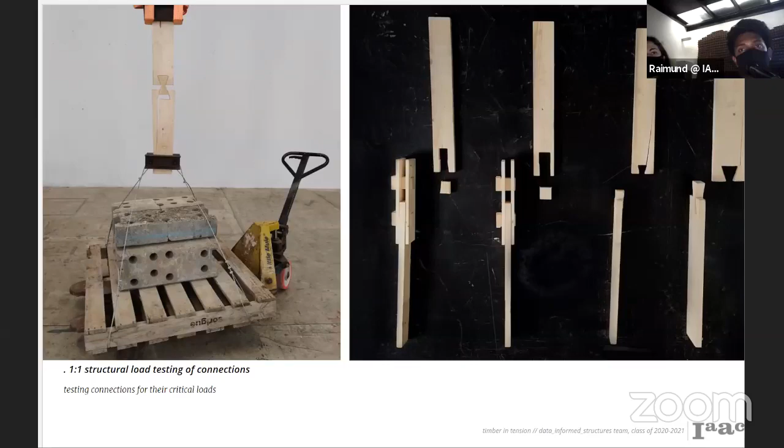We also tested a couple of shortlisted connections we designed for these TIT members for their breaking points to know what we were dealing with. And we also tested a single TIT member glued, screwed, and spliced with a point load equivalent to 1 Raimund Krenmueller. I'm sorry for the pronunciations. And all this brought the new rooftop into being. And now I hand it over to my colleague Michelle to zoom into further details.

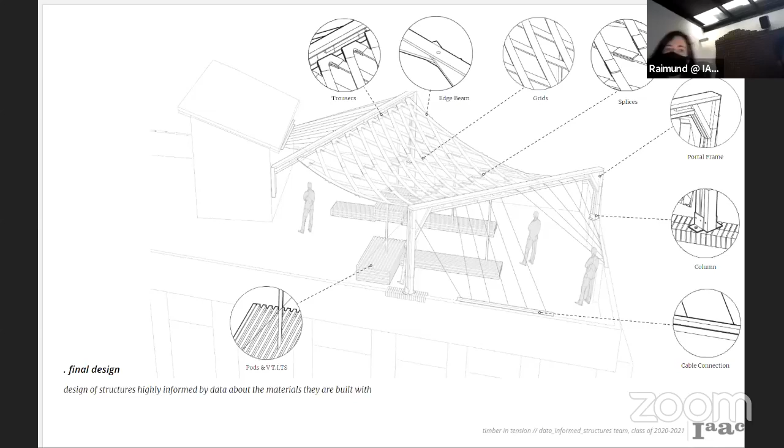Okay, to touch briefly on some of the details that were critical for the design of the structure. One main challenge was how to incorporate the structure within the existing roof structural framework. And what we found during our research is that below the roof was actually an empty space, which meant that the columns could not be supported on the roof itself. So we supported them on the parapet walls. And to do this, we used an angle, bracket, and bolt connection. During the assembly, we attached the prefabricated column and angle brackets to the threaded rods, which were embedded into the parapet wall.

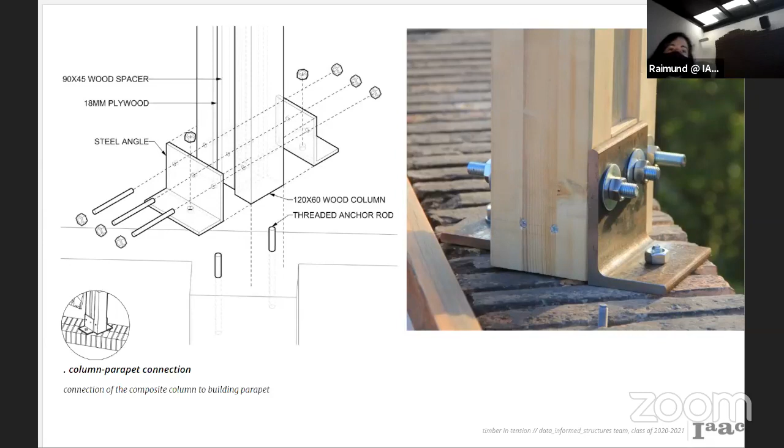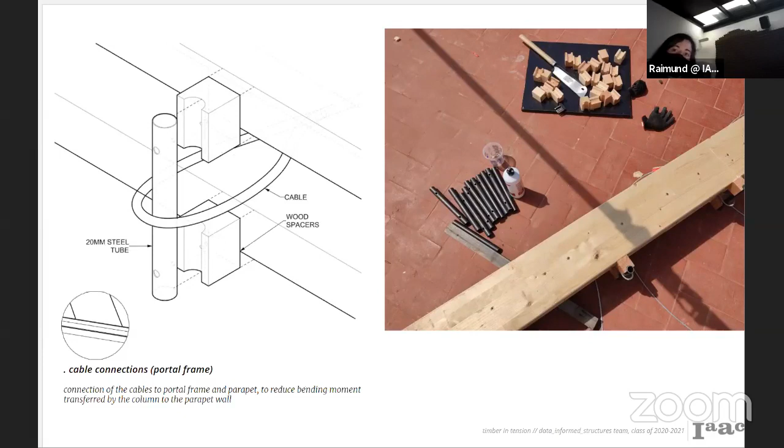During the structural tests, we saw that the tension on either side of the beam created bending stress on the column. So the design of the portal frame uses layers of plywood and wood to prevent rotation and deformation. The openings in the beam were calculated and incorporated during pre-assembly for the cables to pass through. For the cable connections, we focused on balancing the tensile load on either side of the main beam. The spacers were prefabricated, and this made for ease of assembly on site.

The connection of the timber in tension to the beam followed a similar design to the cable connections, only this time the end of the cable is attached to a threaded rod and steel tube. The timber in tension is layered between 2 plates of plywood, which takes advantage of the shear connection between the plates. The plywood plates were CNC'd to fabricate the custom angles required for the design, and using the threaded rod and cable connection allowed for rotation and movement during assembly. The connections were fastened to the main beam while the tensile timber was lifted into place.

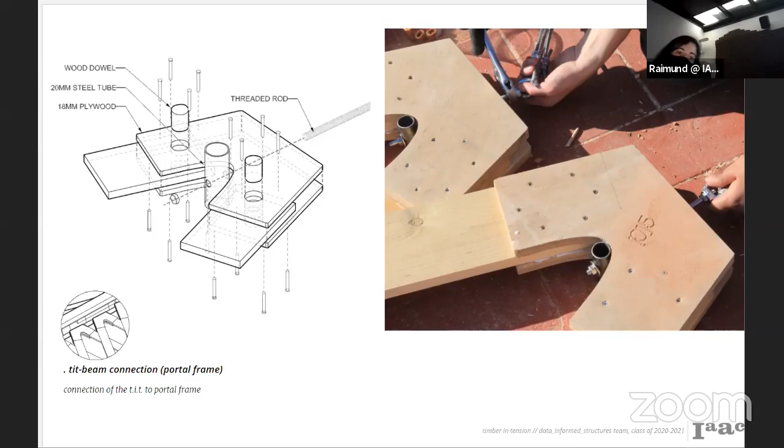The splice plates were designed to allow for the timber to bend continuously without breaking where the timber is spliced. As we saw in the structural test, the dowel performed the best with the shear loads, so we used this concept and altered the sizing for the final design. At the edge beam, we use a similar concept as the splice plates, but use 20mm steel tube as the dowels with washers to cap and hold the wood into place.

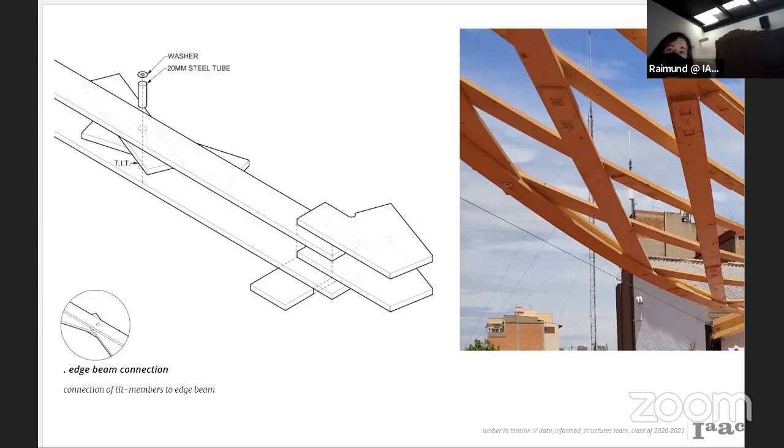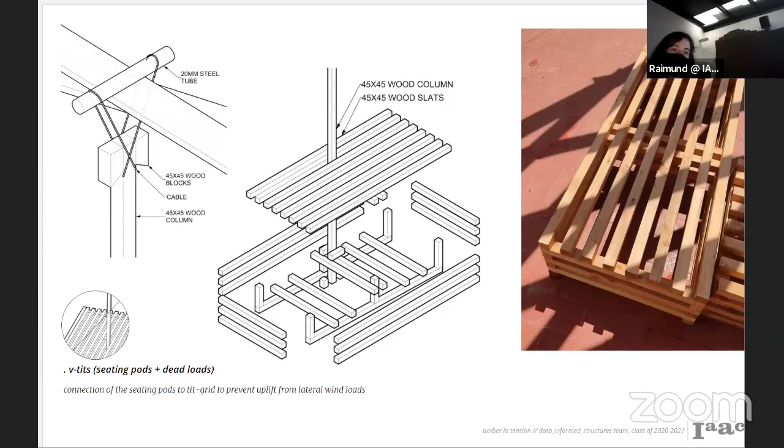One that is kind of questioning the savior image that we discussed before, from PA8: I live on Vancouver Island, BC. The timber industry is devastating our old growth forest and by large clear cutting, changing the natural environment. Snow melts faster in open clear cut areas, removing natural chemistry from the forest floor. Oh, I see that Tom Westwood actually responded to that, and I think Tom had to leave already, right?

Any replies to that? How good is timber really? Does it have this image without deserving it, or what else has to be done, like sustainable forestry, to actually maintain these benefits of timber? Any comments?